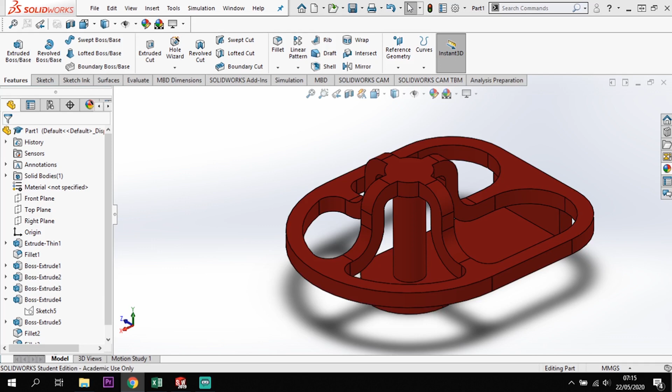So what we're going to do is I'm going to dive into this model and show you how we go around creating it, and we'll produce it and you can have a go. So let's jump in.

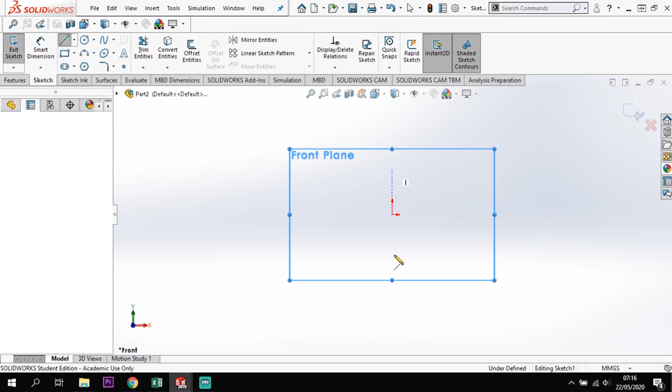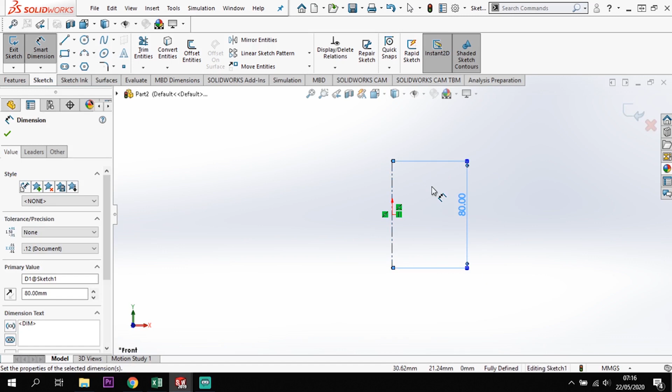The first thing I'm going to do is select the front plane, and on the front plane I'm going to create a sketch. This sketch, I'm going to start off with a center line going through the origin. I'm going to take that center line and make it related by midpoint to the origin point, and put a dimension in there of 80. So that's 80 high. This will be our construction or center point for our model, so everything's going to be dimensioned off this.

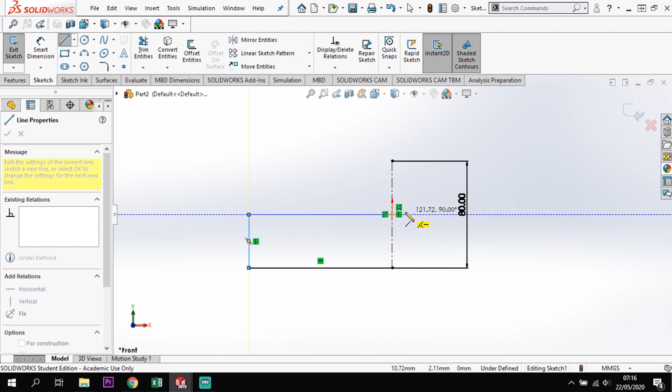Let's start off with our lower section. Our lower section starts from the center point, comes across and up to the same height as our origin, and then it also comes out from here forward that way as well. Putting some dimensions to this, it comes out 30, and it goes across here 105.

We then raise up to the same height as there, which is 40, knowing that's halfway. So if I make them two points horizontally related, like so. All I did to do that was just click on one and hold control and click on the other, and it highlighted both points.

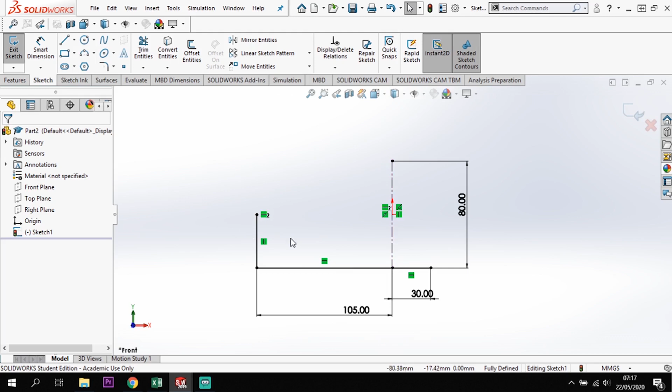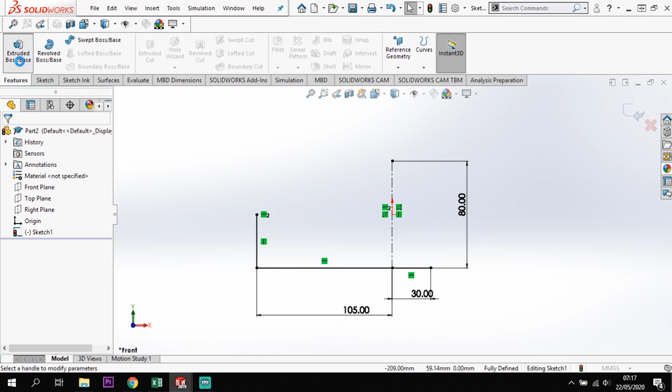So we've got this bottom section here, so I'm going to create an extrusion from that. You'll see I've not drawn out a thickness here, I'm just going to use the thin feature in the extrude button. If we go to the extrude button here, you'll see it's automatically picked up on that line, and the thin feature has automatically been selected.

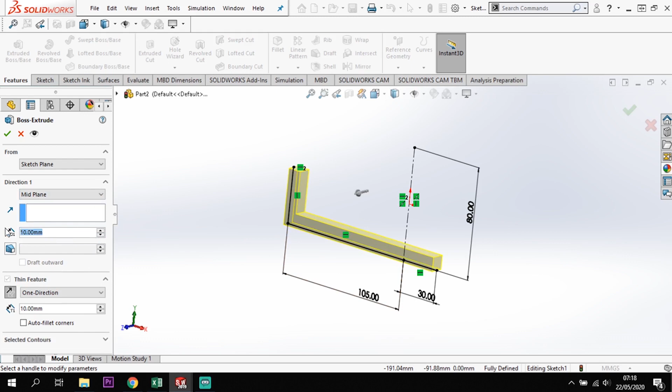At the moment it's pulling it below the line. I want to go above the line, so you'll see there that it now comes inside that line rather than outside of the line. I'm then going to extrude that, but I'm going to extrude it by the midplane, and extrude it by 60, like so. And then tick there.

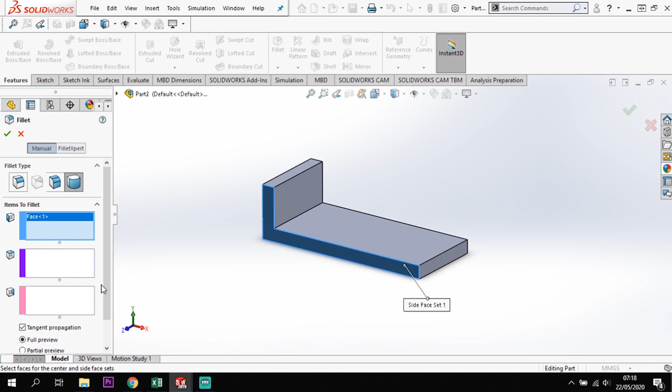Now this here has an arc on the end, so I'm going to fillet that off. I'm going to select the full round fillet tool here, and that requires me to select three faces. I'm going to start with this side, then the end, and then in the final box the far side, like so. You'll see in the preview that it rounds off around those three points. Tick there, and we get a nice sort of D dome shaped end there.

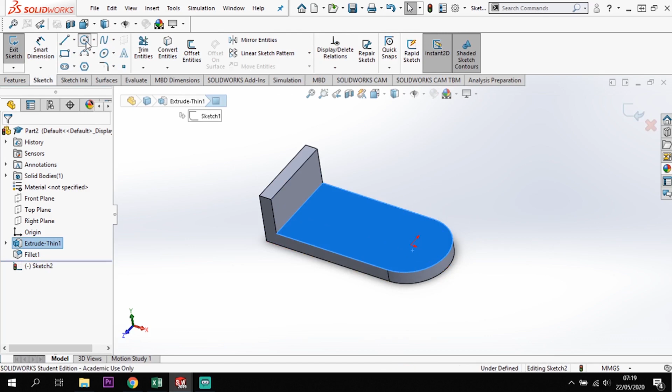So from there I'm going to have a shaft coming up from the centre of here. I'm going to select on this face and sketch on that face. I'm going to go to the circle tool and select the origin there. The reason we put our original construction line through that origin was because most things are taking place through that point.

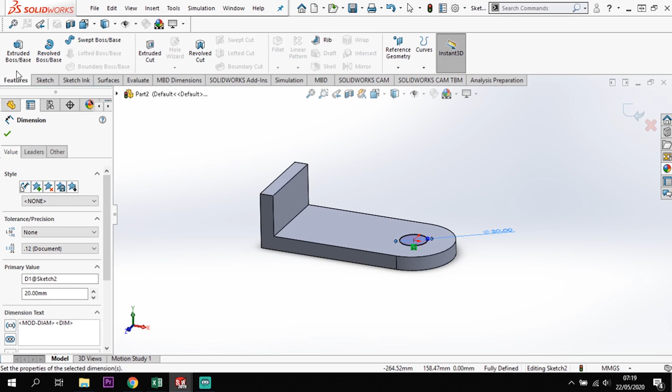From there I'm going to extrude, set a diameter to that circle, and the diameter of that circle is going to be 20, and I'm going to extrude that up. Now I'm going to extrude that up to the highest point, so it's up 10 and it's going to go up to 80, so it's going to be 70 millimeter extrude from that top face, like so. So now we've got that extrude in there.

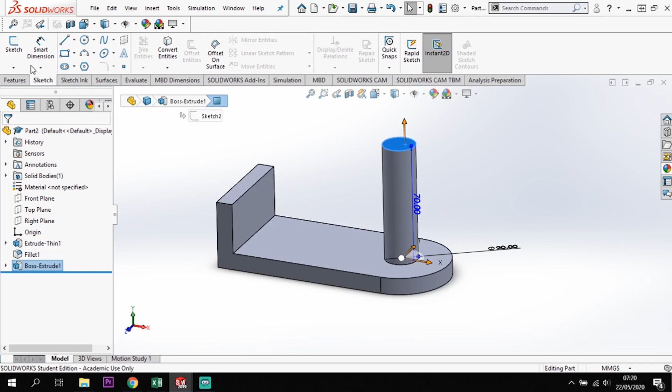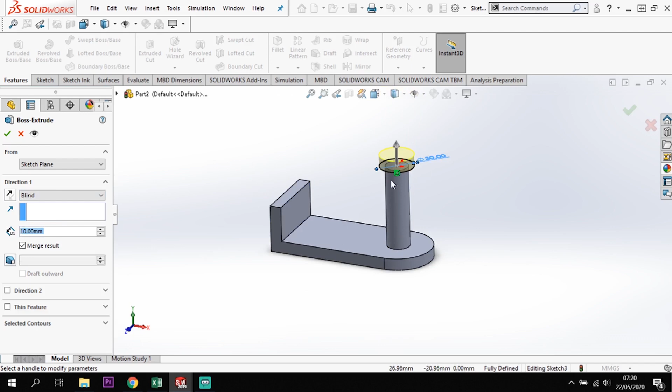I'm going to put the cap on the top of here, and the cap on the top of here is 30mm diameter. So I'm going to sketch on that top face, sketch a circle, and I'm just going to dimension that up to 30, like so. Features, extrude. Now it's going to extrude up. I only want it to extrude by 10, so I'm going to change that to 10. And I want it to go down, so I'm going to flip the direction there and bring it down by 10 and tick.

Okay, so looking good there. I'm just going to view this from the top. All I've done there is hit the space bar. That brings up my view planes, and I can just click which side I want to view it from. So now I'm viewing it from straight down from above.

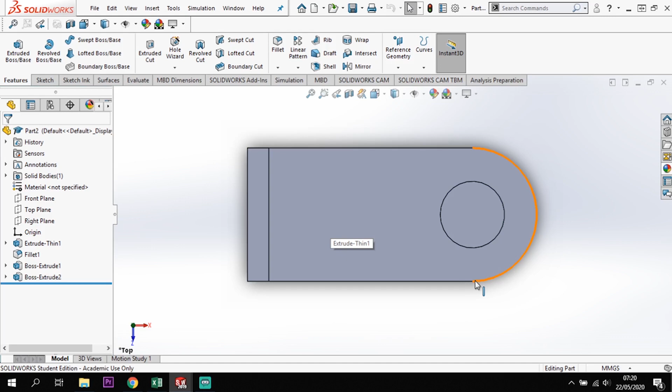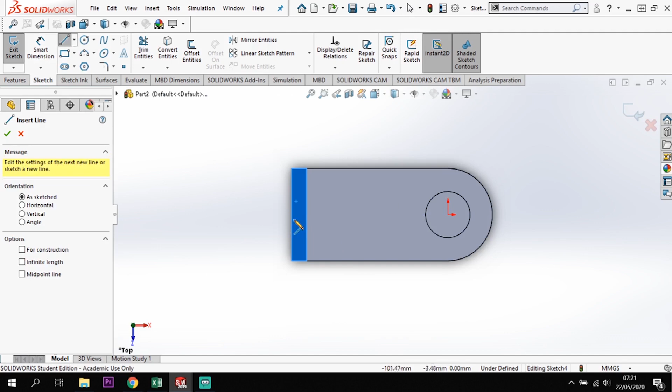What I'm going to do now is put in this outer shape. I'm going to select this part here because I know I want to draw on that level. Sketch, and I'm going to take the line tool, and I am going to start from center here, come out, up to align with my origin, move my cursor away, back to there.

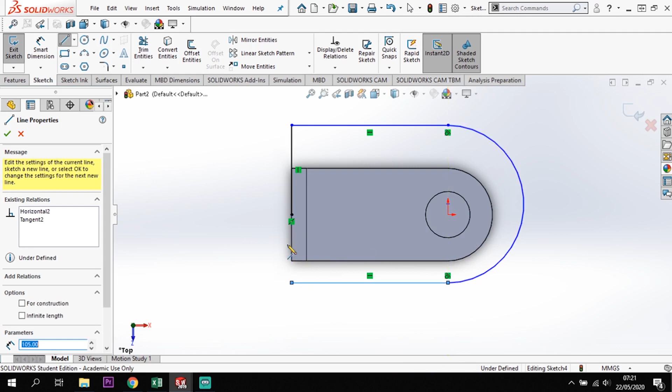I'm going to come round here like so. Drop it on line, and then complete the loop round. Now if I move the cursor away from my point when I'm in a line and then back to it, it changes the line to an arc like you've seen.

Okay, so now I've got that, I'm just going to put a center line in here from my origin down to that point there. So now I know that from this point to the outer edge of here is going to be 75.

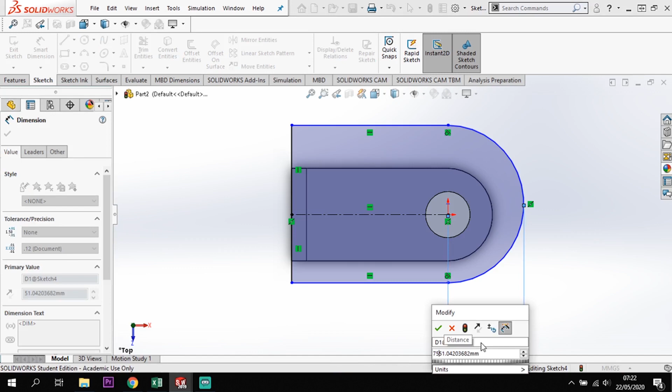Like so. And from there to there is going to be 150 out and across. Now I want to know the distance from there to there, which again is going to be 75. So just pull that into place.

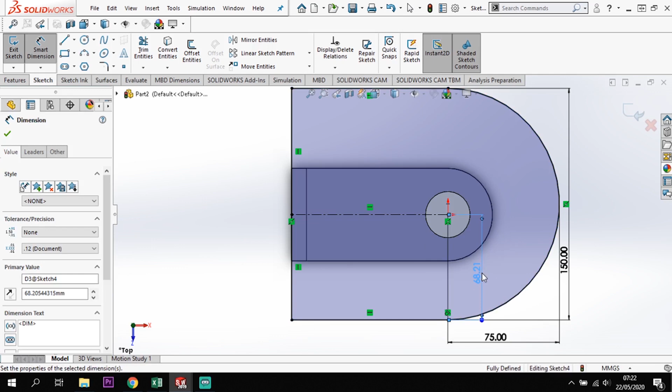We've got that fully defined. What I do need to do is just put a radius on these bottom corners here. And the radius on these bottom corners is going to be 40.

So I'm going to go to fillet here. I'm going to change that to 40. And tick there. And tick there. Like so.

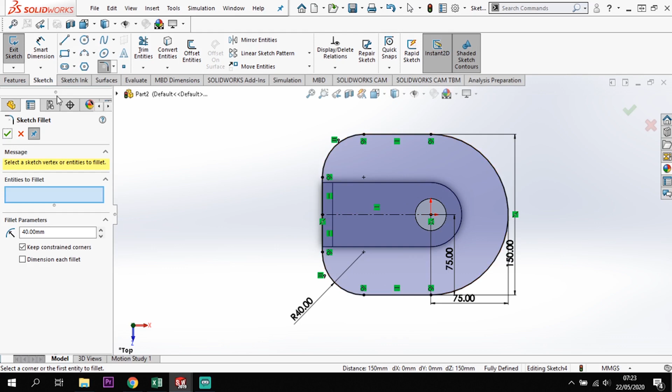Okay, so once I've got that in place, I'm just going to offset this outer edge here. So if I go to the offset tool, I'm going to offset this all by 10.

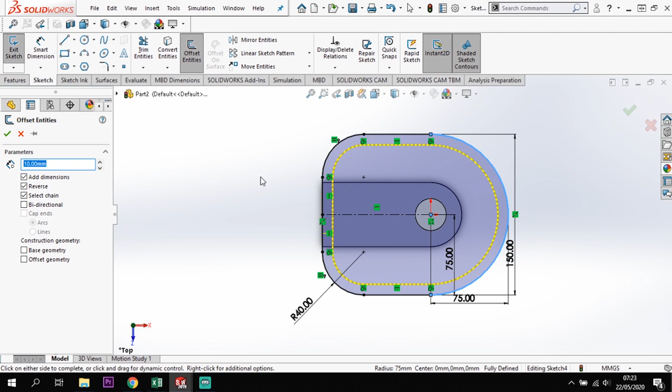So at the moment I've offsetted, I've clicked the outside line, it's selected everything as a chain, which means it's selected all the lines. If I now bring that in, so if I reverse the direction so it comes inside the shape, and tick there, like so, that's brought that inside, like so. Okay, so what I'm going to do with that is I'm going to go to Features, Extrude.

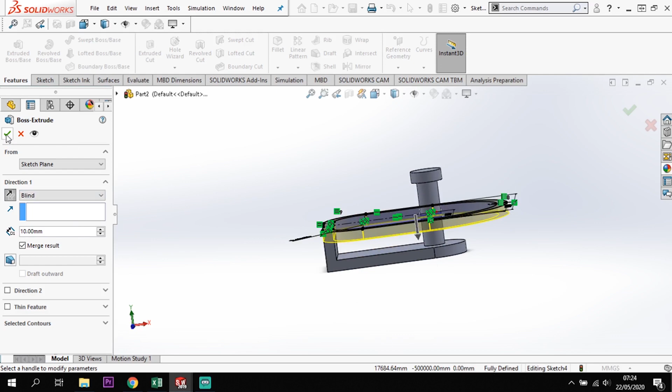Extrude, and rather than extruding it up, I'm going to bring it down. So I'm going to reverse the direction so it comes down into the lower half of the model, and tick there. And we've got that outer ring.

Now our last parts to this is connecting this outer ring up to this top surface. So let's have a go at doing that. So what I'm going to do is I'm going to use the section tool to help me here. So the section tool is the fourth one along on this row here.

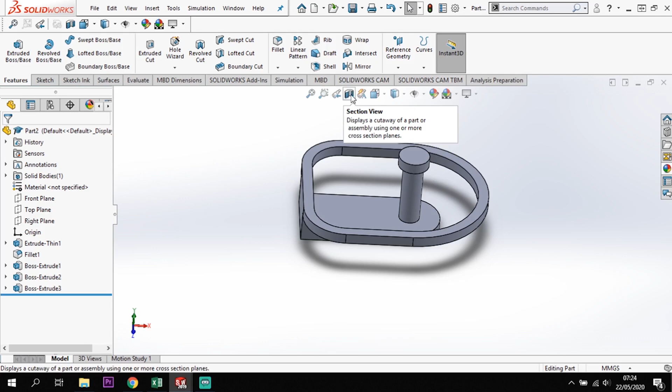Clicking this, and you'll see it's cut through halfway there. So if I'm happy with that view, I can change the views here, which way I want to cut through. I'm happy with that first view, so I'm going to tick that, and I'm going to be going along this plane. Now this plane here should be the front plane.

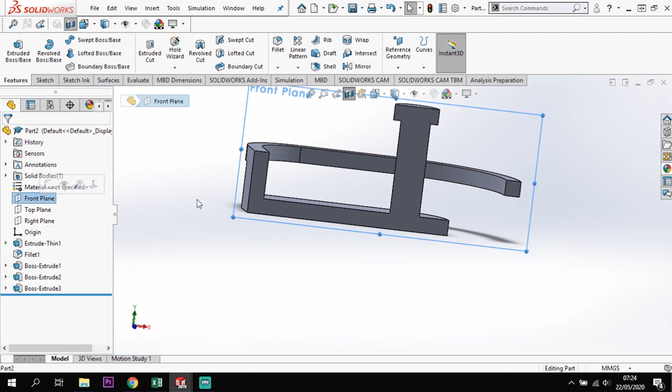So I'm going to sketch on the front plane. So I'm moving straight on with the front plane there, like so. I'm going to create the profile that I want for these sort of curvatured arms here.

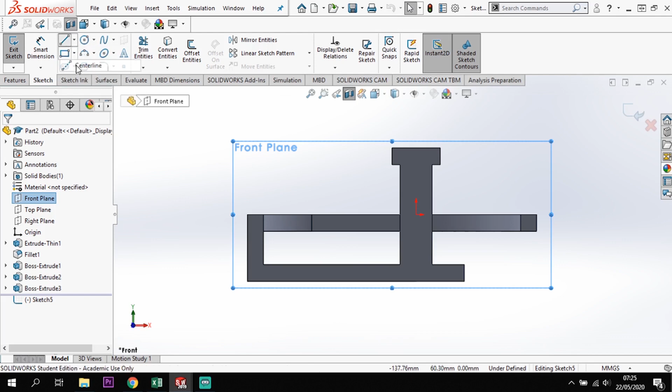But to do that, I'm just going to put a centre line down here first, like so. Okay, so I'm going to start from that centre line. I'm going to come across, I'm going to come down, and I'm going to come across to this end point there, like so.

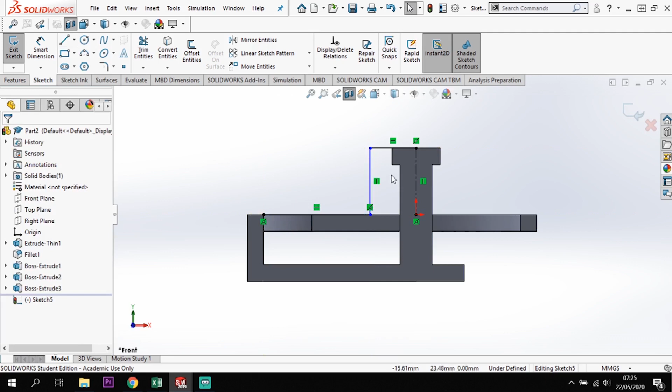Okay, so what I want to know is the distance this is going to come out. I'm going to repeat the process coming out this way as well. Now we'll see if it picks up in this corner. Sometimes it doesn't like to pick up on the corner, but we'll see how it gets on.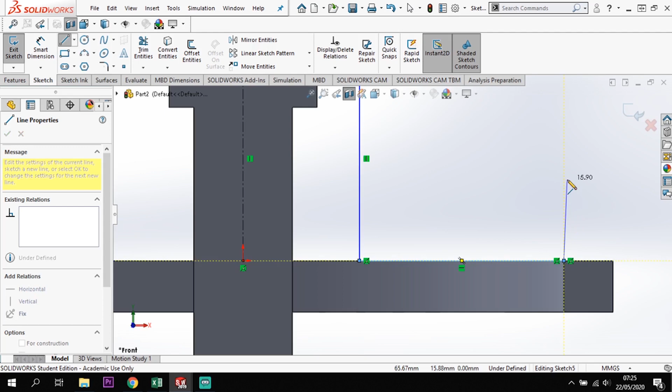Okay, so I'm going to create an offset distance between them there. The distance between them is going to be 70, and it's going to be 35 from one side to the other. So one side to the centre, so we're offset exactly halfway.

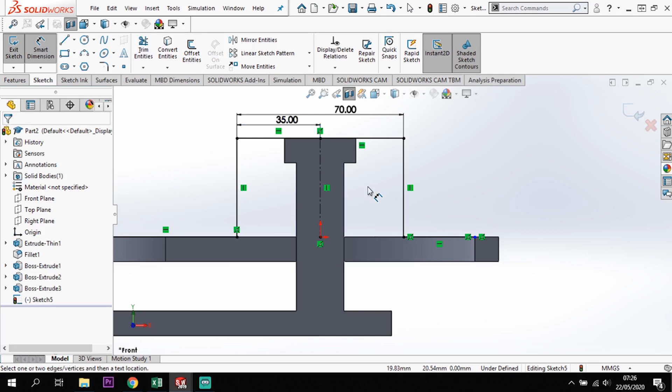Okay, so once we've got that in there, we now are going to offset this down by 10. So if I go to the offset tool, in fact actually first of all I'm going to lock this out here. So from the centre line to that point there is going to be 65. So let's drop that down there, and we're spot on 65.

Okay, now I can offset this. So offset, it's selected that line all the way along as a chain. I'm going to reverse the direction, keep it at 10, and drop that in there like so.

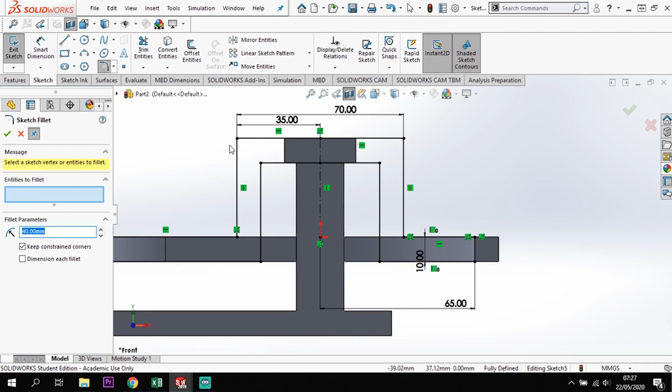Okay, now that I've got that in there, I want to create some radiuses on this. I'm going to go to the radius tool here, and create first of all a 15 milli radius on here and on here, and take that.

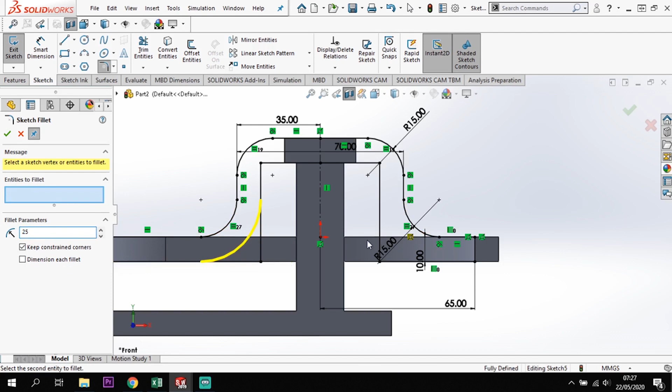Then what I'm going to create is a 25 milli radius at the bottom here, and a 15 one here as well. So if I go to 15 there and 15 there, and 25 on that inside edge at the bottom, and 25 on that inside edge there at the bottom, like so.

The last part of this is just that small one at the top here, which is going to be 5. So there, and there, and tick. Now we've got that curvature in place.

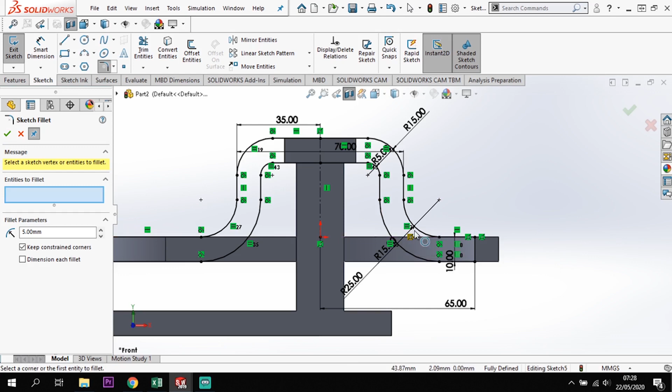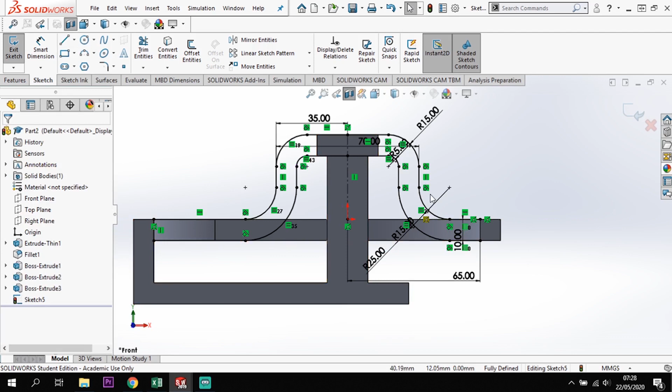I am just going to close off this sketch on either end with a line down between the two points, like so.

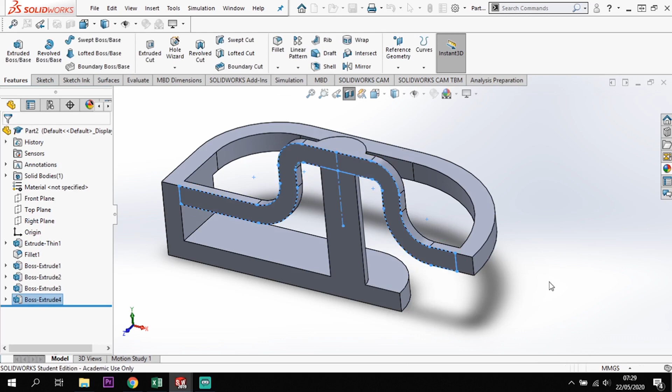Now once we've closed that off, I'm going to go to Features, Extrude. I want it to come out 10 each way, or 10 thickness, about the mid-plane like so, and then tick. And we've got that over the top. Now it's not throwing up an error, so we're good there.

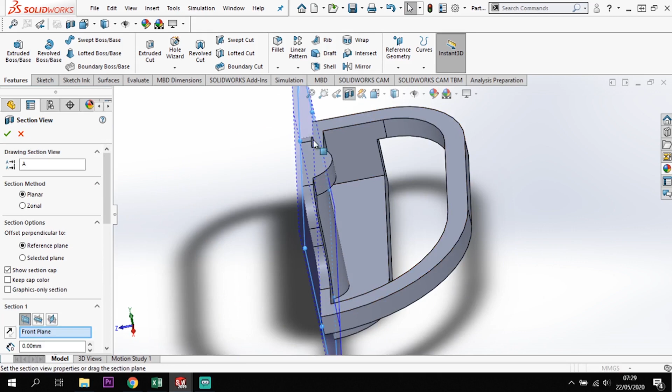Lovely, so what we've got here is this looping across this side. Now we're going to have to do the same across the other. So if I just come out of that section view, I'm going to put another section view going across here, so that would be the end view there, like so, and I'm going to tick there.

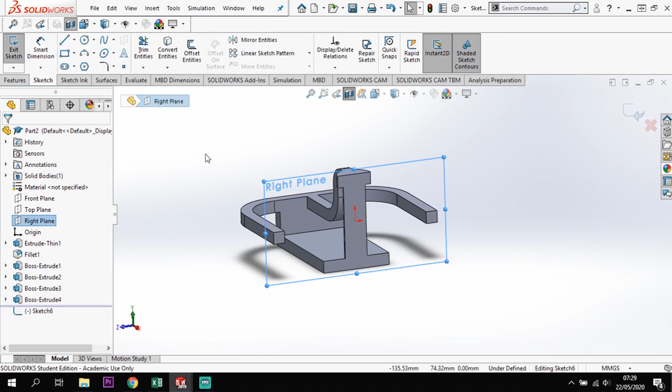Now the advantage to originally setting up that centre line down the origin means that now I can select the right plane, and it will go through that centre position of this shaft, and I'll be able to draw onto here. So right plane, and I'm going to sketch on there, view it straight on from the right plane, and I'm going to create the same process.

So line across, up, all the way across again, down to the end point there, and we get that shape.

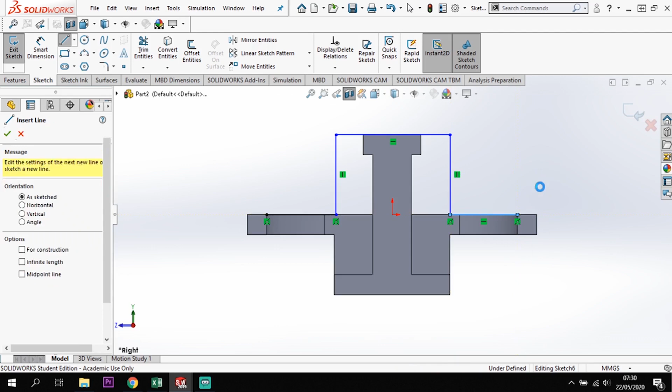Now, again, I'm going to put a center line in. Okay, so I've connected that up with the end point. I'm going to make this line vertical, and that should just drag that in a bit.

Now, the top line there needs to be at 70, like so. Okay, so we are locked in there to 70, and we should be a height here of 40. Perfect.

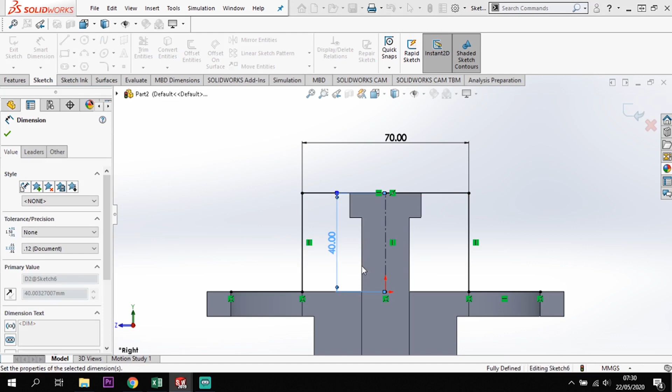Now I'm going to offset this again by 10, so select this chain, this line, offset by 10 down, and tick in place. So we're following that same process we did for the last one.

Join up these ends on either side, like so. So we're just closing off that sketch. Now we've closed off that sketch, I can now fillet these corners.

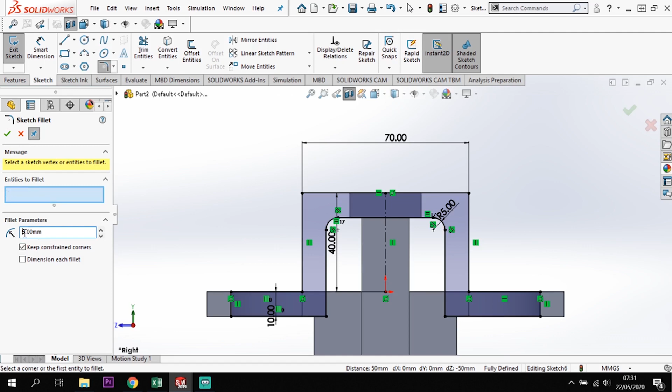So we're going to create a fillet on these edges. Again, fillet tool, I'm going to run through the same ones. We're going to start with the 5 in this case, since it's already on there, and that's those 2 top inside ones. We'll then move to the 15, and the 15 is going to include that top one, and these 2 lower ones here. Tick that.

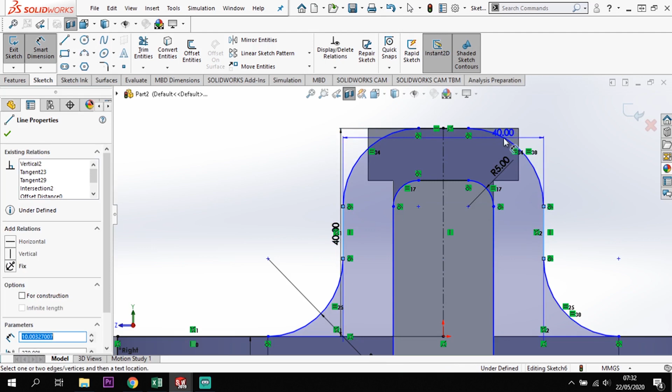Now we've just lost some shape to this, it's not an issue. I'm just going to get this point here and drag this out across there. If we take that back to 70, it'll pull it back out, like so.

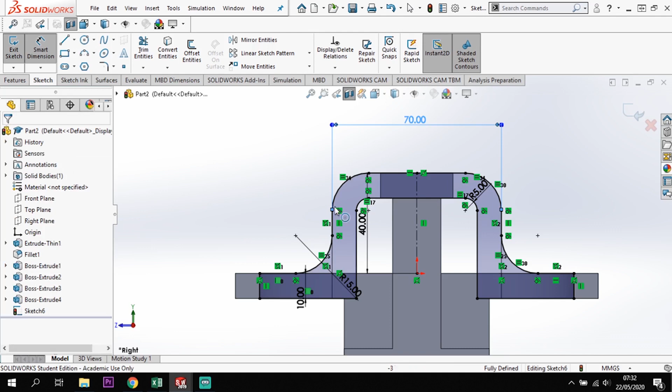Now the reason it lost that shape is because I dimensioned it rather than up to the lines, I dimensioned it up to the top corner points, and because this radius got rid of them top corner points, it no longer had a relationship there. So just be careful when you're dimensioning what you're dimensioning to as you edit your model.

The last bit here is just going to be radius off these bottom corners. So we're going to need the 25 now, so we're going to go to 25, and we're just going to round off these lower ends or edges here, like so.

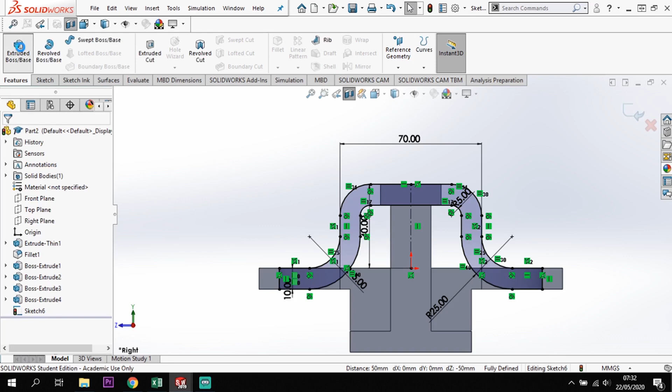Now I've got that in place, I can go to Features, I can go to Extrude, and I'm going to extrude again around that mid plane, and you'll see our preview now, going across that center line, or that line that we've created, that sketch, and we now have...

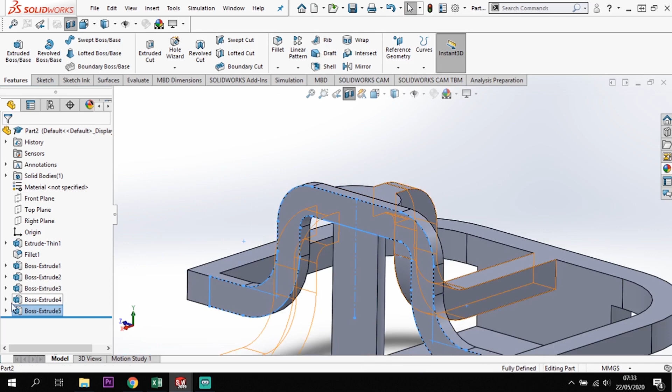Now defined fully. Let's pop back into that sketch and edit that final line. Edit sketch. Our...